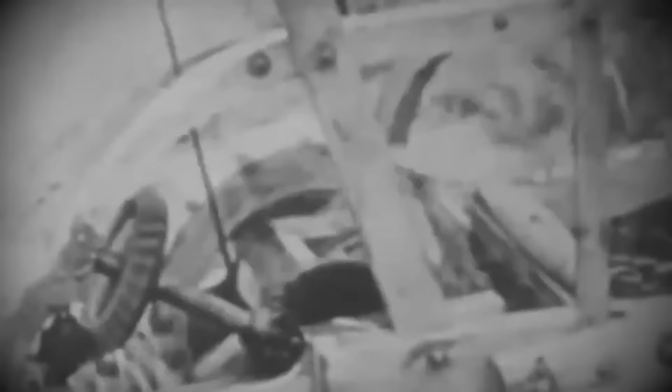The trouble started in Europe in 1914. World War I wasn't just a conflict of munitions, it was a war of logistics. As the front line stabilized, the global food supply chain buckled. The primary engine of agriculture for millennia, the horse, was suddenly removed from the equation. British and French armies, working through American agents, purchased millions of draft animals to haul artillery and supplies.

By 1917, relying on the remaining livestock became an economic impossibility. A single horse required 5 acres of crops annually just to sustain itself. With corn prices spiking 156% since the start of the hostilities, biological power was no longer viable. Simultaneously, the labor force evaporated. Young men left for the front, leaving fields unworked.

The global demand for wheat skyrocketed, and the only solution was a machine that didn't consume expensive grain or require rest. The tractor ceased to be a novelty for the wealthy. It became a tool of survival.

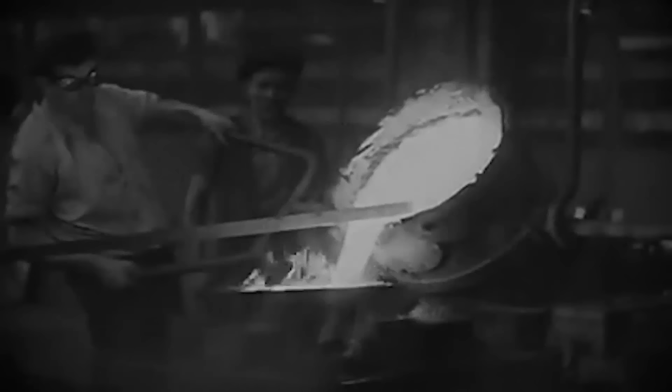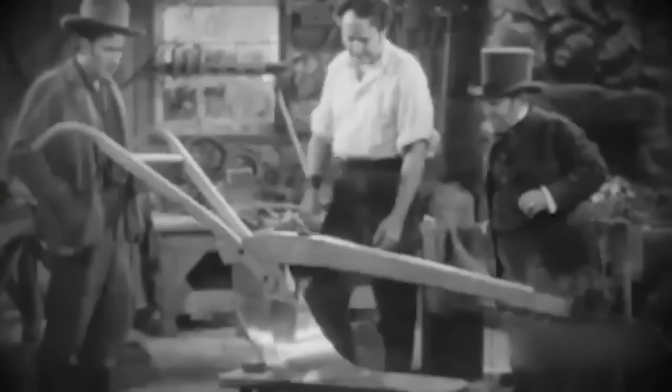In Moline, Illinois, John Deere remained the undisputed leader in tillage. They were masters of metallurgy, forging blades that could scour clean, even in sticky prairie soil. They had an extensive dealer network and a reputation for durability. However, they possessed a fatal technical gap. They were blacksmiths in the age of mechanics. They understood leverage in steel, but they had almost no internal capacity for internal combustion engineering.

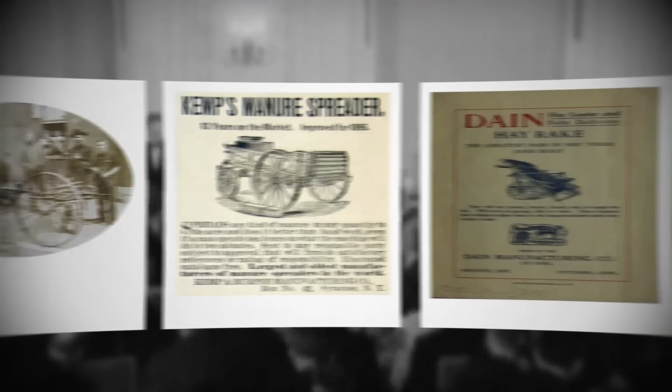At the helm, William Butterworth viewed the emerging tractor market with skepticism. The son-in-law of Charles Deere, Butterworth was a fiscal conservative who prioritized liquidity over innovation. Between 1910 and 1912, Deere had completed a massive acquisition spree, buying 10 companies to build a full line of implements. Their capital was tied up in new factories, leaving no liquidity for R&D experiments.

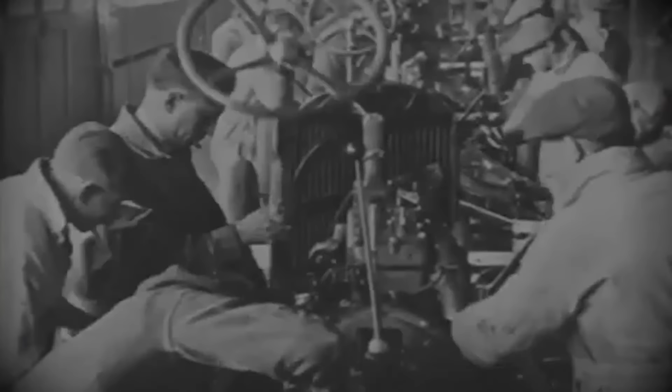In September 1916, Butterworth issued a blunt directive regarding mass production. "I am opposed to any discussion on Deere manufacturing tractors." While he allowed a small experimental run of Joseph Dain's all-wheel drive tractor, he refused to commit the capital necessary for a full-scale rollout. He effectively stalled the company's entry into the mass market just as it began to close in.

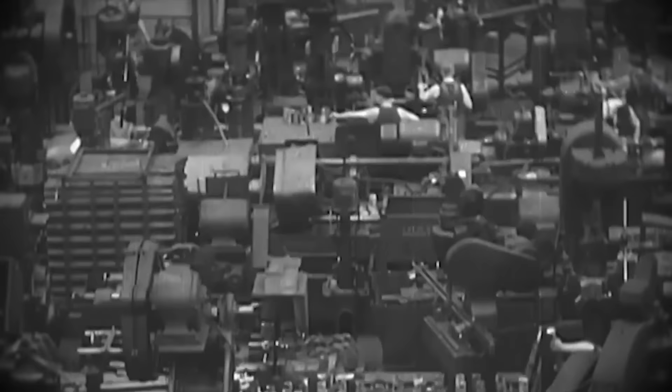By 1917, the industry landscape shifted into a pincer movement, and Deere stood directly in the center. On the high end sat the heavyweights, International Harvester. They were the General Motors of the field. Their Titan 10-20 and Mogul 8-16 were the standards of the day, but they were dinosaurs.

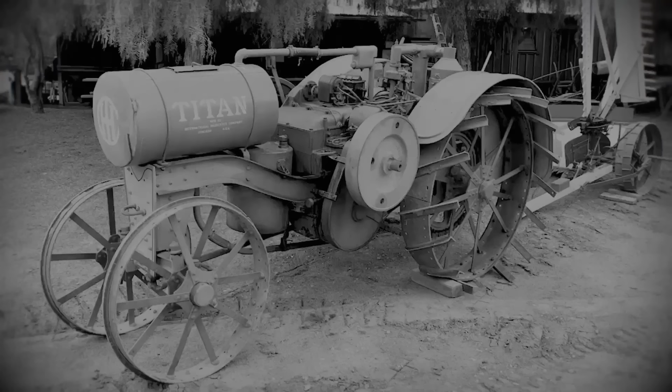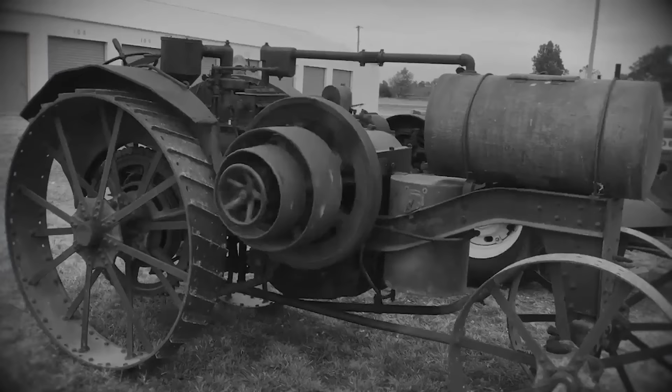The Titan was a massive 5,700-pound machine, powered by a slow-turning 2-cylinder engine that hammered away at just 500 RPM. These were essentially stationary engines on wheels, reliable, but heavy, expensive, and clumsy in small fields. If Deere attempted to build a heavy tractor to compete here, they would be outspent and out-engineered.

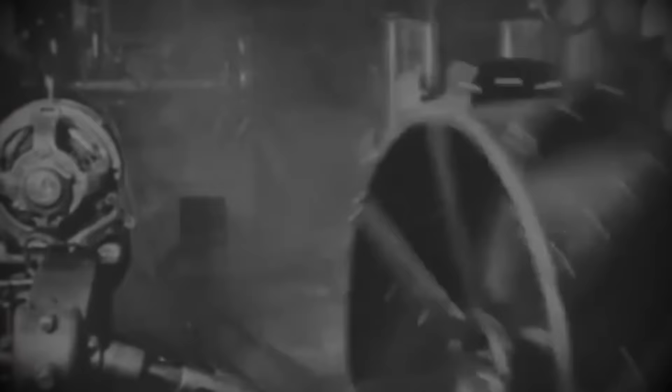The threat from the low end, however, was far more dangerous. Henry Ford turned his production capacity toward agriculture, introducing the Fordson Model F, and it completely rewrote the rulebook. Ford didn't just build a cheaper tractor, he built a fundamentally different machine. The Model F ditched the heavy rail frame entirely for a revolutionary unit construction design, where the engine, transmission, and rear axle housing were bolted together to form the chassis.

It weighed only 2,700 pounds, less than half the weight of an IH Titan. Yet its 4-cylinder, 251 cubic inch engine still delivered 20 belt horsepower at a screaming 1,000 RPM. Then came the price. Ford dropped the Model F at $750. This was predatory pricing. A Waterloo Boy Model N cost over $1,000. An IH Mogul was nearly as much for half the agility.

Ford was willing to accept razor-thin margins to capture market share, relying on unprecedented volume to generate profit. While competitors needed hundreds of dollars in profit per unit to survive, Ford could thrive on a fraction of that. He produced tractors on assembly lines at a speed traditional implement manufacturers could not comprehend, let alone match.

Butterworth's hesitation had trapped the company in a deadly position. Deere was too small to fight the capital dominance of International Harvester, and their production methods were too expensive to combat the engineering and pricing of Henry Ford. This was an existential crisis.

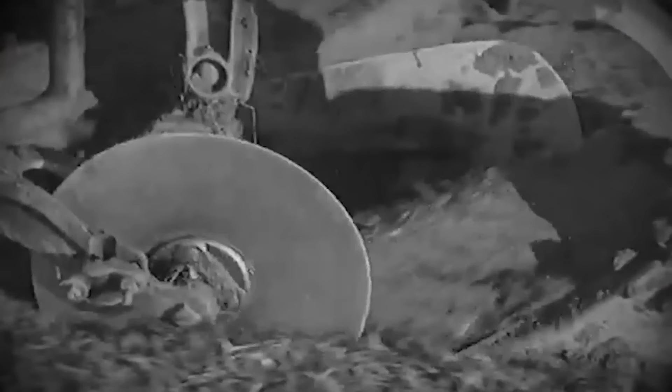Farmers weren't just buying tractors, they were abandoning horse-drawn plows. Every bright gray Fordson delivered to the farm was a Deere plow that went unsold. The tractor was no longer the future, it was the current standard. John Deere, the most iconic name in American agriculture, was on the brink of obsolescence. They needed a machine. They needed it immediately, and the paralysis in the boardroom had to break.

When the reality of the Fordson hit the boardroom in Moline, the atmosphere shifted instantly from hesitation to emergency execution. Deere wasn't just behind the curve, they were invisible in a market that was exploding. Management stopped debating whether tractors were a fad and started authorizing capital for anything with an engine. What followed was a period of frantic experimentation that produced some of the most mechanically confused machines in the company's history.

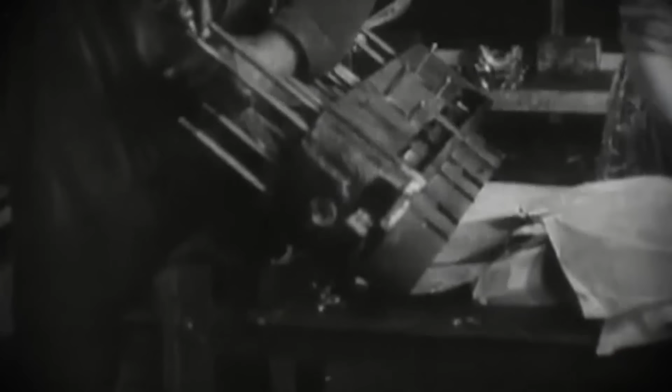You have to understand the level of desperation here. Deere didn't just try to build a tractor, they scrambled to invent one from scratch without a blueprint. The result was the Melvin, a mechanical dead end that looked less like a tractor and more like an engineering accident. The Melvin defied the logic of Midwestern farming. It was a motor plow, where the engine and the plows were fused into a single rigid frame.

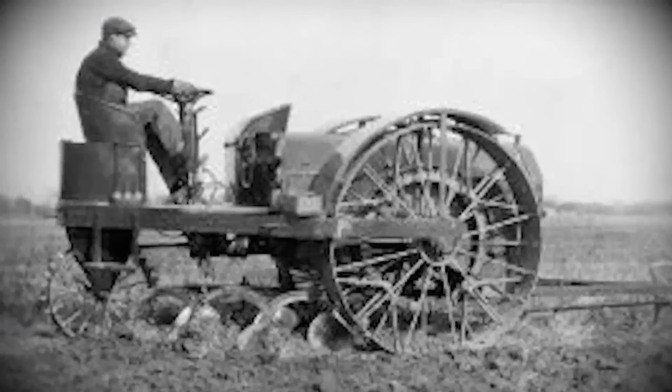While the concept seemed efficient on paper, it was a nightmare in the dirt. It was heavy, underpowered, and nearly impossible to maneuver. A farmer needs to pivot tight at the headland to line up the next furrow, but the Melvin handled like a locomotive. It became a sunk cost, a clumsy beast that was quickly scrapped, leaving the company embarrassed and empty-handed.

Internalizing the lesson that outside partnerships were risky, the board turned inward to their own head of engineering, Joseph Dain. Dain was a purist, a visionary who believed John Deere should never badge a product that wasn't mechanically superior. He locked himself away and designed a machine that was arguably decades ahead of its time. The all-wheel drive train was a masterpiece.

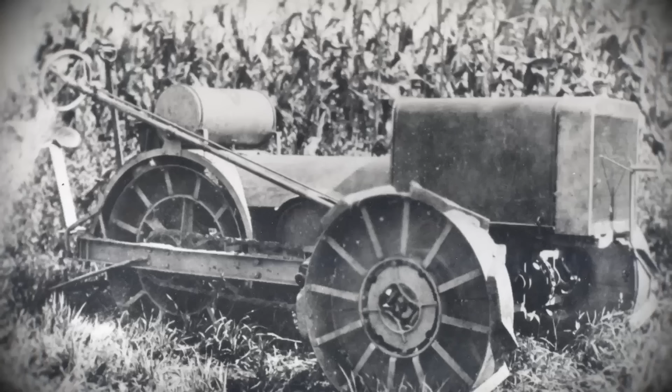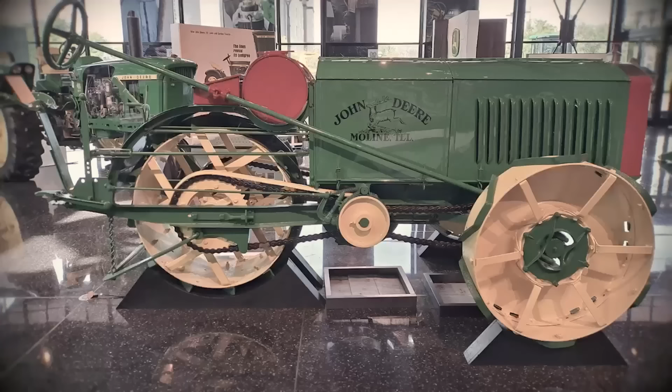The R&D department looked at the Dain and saw the future, a machine that finally bridged the gap between the blacksmith and the engineer. However, the board of directors looked at the Dain and saw a bankruptcy filing. The problem wasn't the engineering, it was the unit cost. To build the Dain with its precision-cut gears and high-tensile steel cost a fortune.

Internal estimates pegged the retail price between $1,200 and $1,600 just to break even. This hit the table at the exact moment Henry Ford was flooding the market with the Model F for $750. The math was brutal. You cannot sell a luxury tractor to a farmer struggling to buy seed. The Dain was too good, too expensive, and too late.

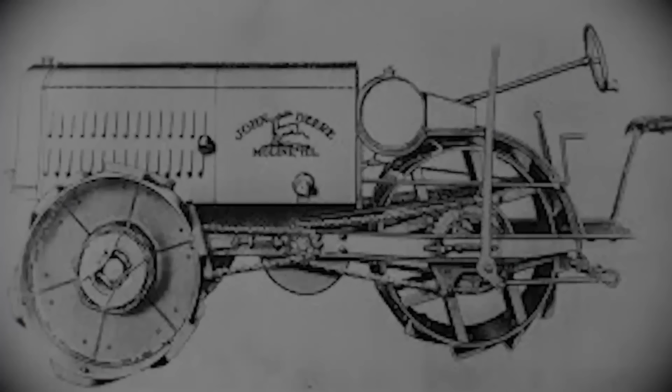Tragically, Joseph Dain never saw the final decision. In October 1917, while pushing himself to the limit field testing the machine in the cold damp of fall, he contracted pneumonia and died. The project died with him. Butterworth shelved the plans. They had built the perfect tractor, but they had to abandon it because it couldn't survive in a Ford world.

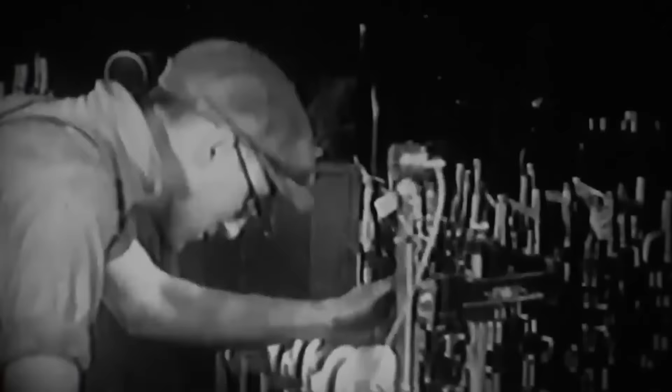The company was left in a darker place than where they started. They had wasted years and capital on the Melvin disaster. They had sacrificed their best talent on the Dain tragedy. Now as 1918 approached, the king of the plow had no tractor, no engine, and no plan. They had tried the path of acquisition, and they had tried the path of perfection. Both had failed.

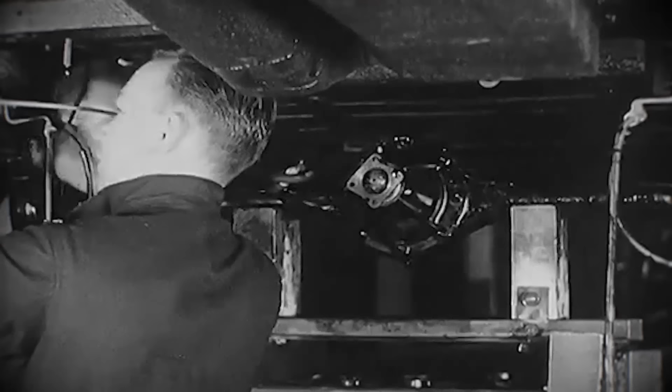With their engineering pride stripped away, the directors realized they had run out of time for invention. They could no longer afford to be idealistic. If they wanted to survive the year, they would have to stop looking for a beautiful solution and start looking for a profitable one. The answer wasn't in Moline, it was waiting in Iowa, in the form of a loud, vibrating, kerosene-burning machine that their own engineers considered an insult to the mechanic's trade.

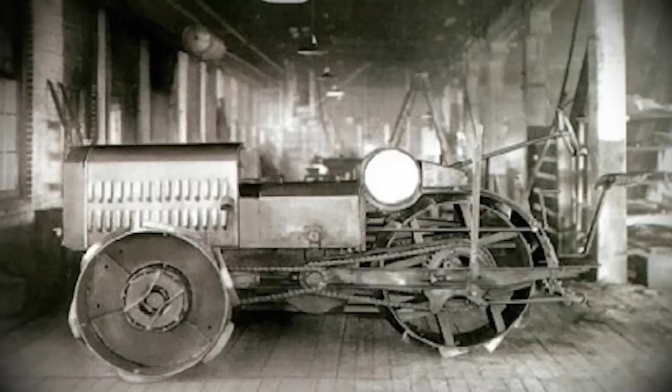The solution didn't come from a drawing board in Moline. It came from a pragmatic factory in Iowa. Enter the Waterloo Boy. If the canceled Dain project was a thoroughbred, the Waterloo Boy was a draft mule. It was loud, exposed to the elements, and transmitted vibration so violently that operator fatigue was a genuine hazard.

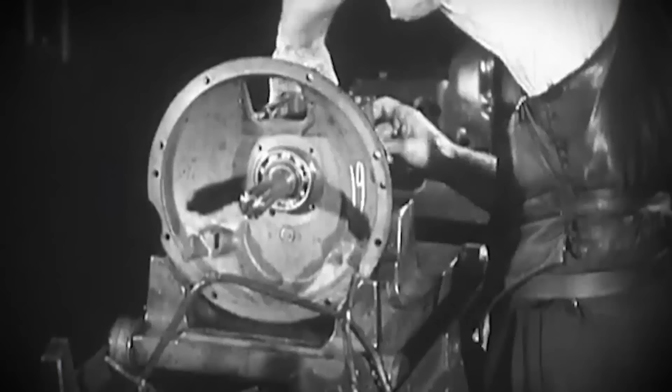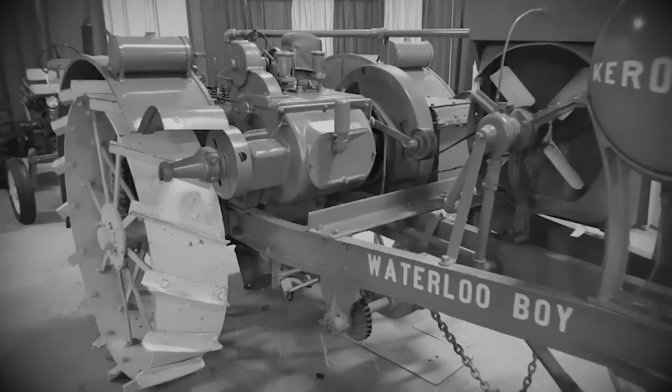Deere had spent 6 years trying to develop a tractor internally, pouring capital into prototypes like the Dain only to produce negligible volume. They realized too late that a boutique machine could not compete with Ford's assembly line or International Harvester's market saturation. They were cornered, and the Waterloo Boy was the only viable lifeline. To understand why this machine worked, you have to look at the power plant. The Waterloo Boy was driven by a horizontal 2-cylinder engine with a unique firing interval.

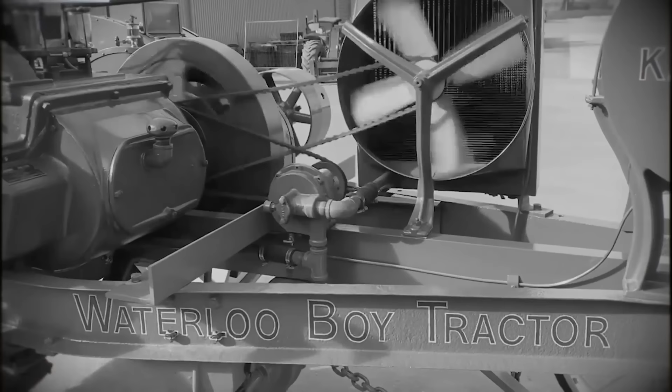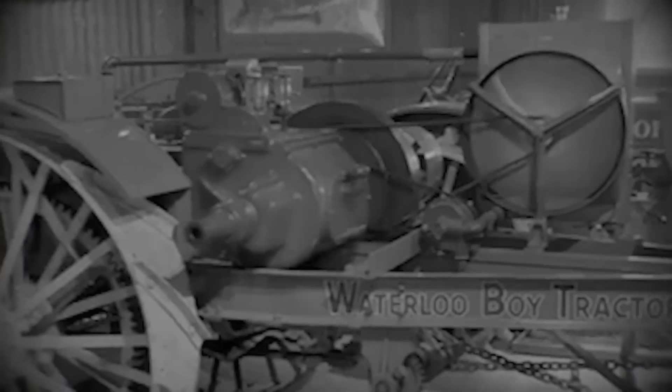It fired at 0 degrees, then again at 180 degrees, followed by a long passive coast of 540 degrees. This massive gap in the power stroke required a heavy flywheel to store kinetic energy and keep the crankshaft spinning during the lull. This created the distinctive syncopated rhythm that would eventually earn these engines the moniker Johnny Popper.

The design wasn't just eccentric, it was a specific engineering response to fuel economics. In 1918, gasoline was a precious war commodity. Kerosene, however, was a cheap, heavy byproduct of refining that few engines could burn effectively. It had a high flash point and tended to soak spark plugs rather than vaporize.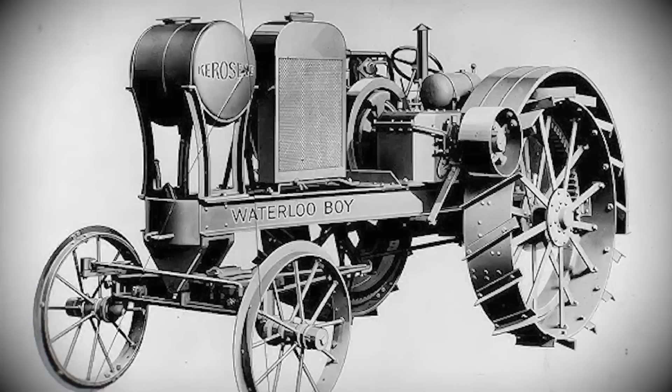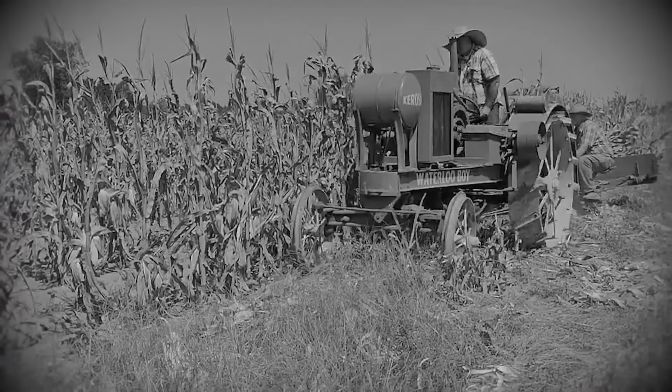The Waterloo Boy solved this through thermal mass. The engine utilized a low compression ratio and a heavy cast iron block that retained immense heat. This heat effectively cooked the kerosene in the manifold, vaporizing it enough for ignition. It was a hot engine operationally. It smoked and it knocked, but it turned the cheapest fuel available into reliable torque when more delicate, high-compression engines failed.

This brought William Butterworth to the most expensive decision of his career. He wasn't just buying a patent, he was acquiring a completely different manufacturing philosophy. The Waterloo Gasoline Engine Company was already moving volume, but the asking price was staggering, $2,350,000. In 1918, that sum represented a massive leverage of the company's future. Butterworth, a man who despised debt, was being asked to drain the reserves for a factory that built a machine his own engineering department despised.

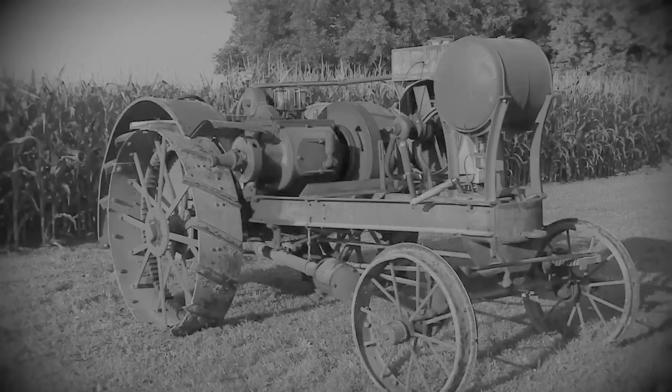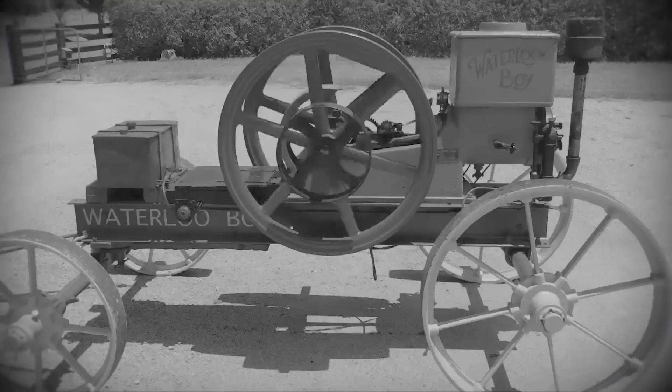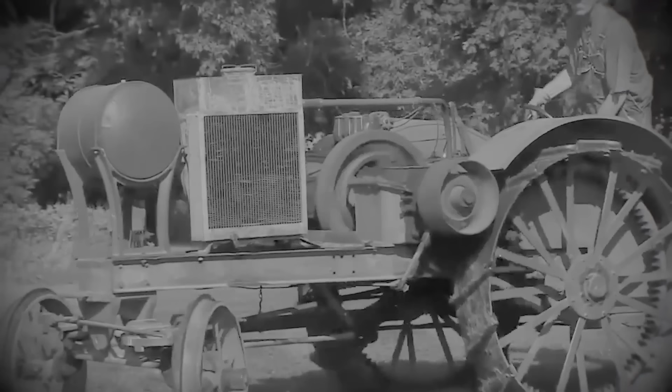The internal conflict was palpable. Moline engineers dismissed the Waterloo Boy as crude agricultural iron. It lacked the tight tolerances, enclosed gearing, and high-tensile steel of their deceased Dain project. They argued that placing the John Deere trademark on such a crude, vibrating contraption would degrade the brand. But the dealers saw the reality of the field. They saw a tractor that maintained traction in the mud, and a machine a farmer could repair with basic hand tools.

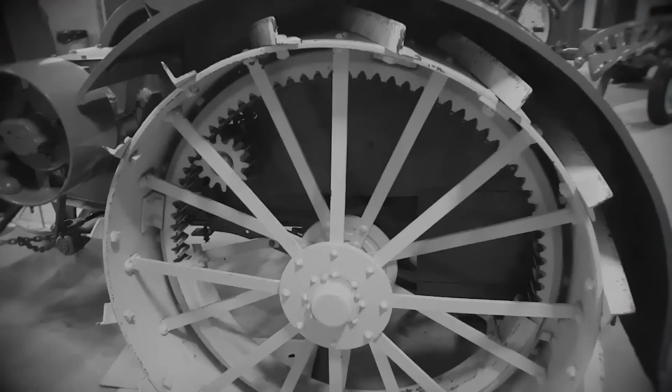More importantly, when you looked at the spec sheet, the philosophy gap was obvious. Ford was selling a Greyhound, lightweight, high-revving, and cheap. The Waterloo Boy was a bulldog. It was a heavyweight contender at 6,100 pounds, anchored by a massive 465 cubic inch engine that chugged along at just 750 RPM. It cost significantly more, around $1,150. But that extra weight and displacement translated into something the Ford lacked: sheer, low-end torque and a cooling system that didn't boil over after an hour of hard plowing.

Butterworth looked at these numbers. He saw that while Ford won on price, the Waterloo won on durability and simplicity, crucial factors for farmers transitioning from horses. He realized that technical perfection was the enemy of corporate survival. On March 14, 1918, the hesitation ended. Butterworth signed the check. John Deere acquired the Waterloo Gasoline Engine Company. With one signature, the company pivoted its core identity from steel plows to kerosene horsepower.

The deal was done, but the integration was hostile. Deere owned the factory, but they had inherited a cultural conflict that would define the company for the next decade. As the ink dried, the company effectively fractured. One half of the story was about to unfold on the war-torn fields of Britain, while the other was brewing on the factory floor in Iowa.

The validation of this controversial purchase didn't happen in an American showroom. It happened in the mud of the Western Front supply lines. By 1918, Great Britain was effectively under siege. German U-boats had severed the critical Atlantic supply arteries, creating a hunger blockade that threatened to starve the Allied war effort into submission. Britain needed to grow its own food, and it needed to break ground immediately.

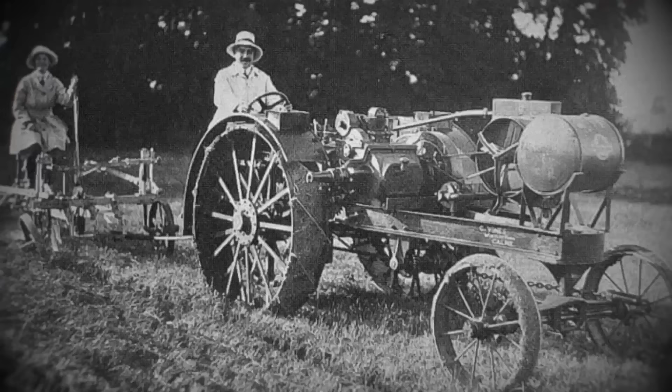Deere found themselves stepping into an operation that was already running at redline. Since 1915, an importer named L.J. Martin had been bringing Waterloo Boys into the UK and rebranding them as the Overtime. These units were painted a nondescript battleship gray, stripping away the American branding for the British market. While the executives in Moline terrified themselves thinking this crude machine would damage their premium reputation, the Overtime was busy saving the country.

The conditions in England were brutal, but this is exactly where the low-tech nature of the machine became its greatest asset. Gasoline, petrol, was strictly rationed for the military, making the Waterloo Boy's ability to burn cheap, unrefined kerosene, known as paraffin in the UK, a logistical lifesaver. Furthermore, with the male workforce conscripted, the fields were often worked by the Women's Land Army. These operators needed a machine that was simple and forgiving, not a complex piece of engineering that required a master mechanic to finesse. While complex British steam engines bogged down in the deep clay, the Overtime kept chugging.

But back in Moline, there were no celebrations. A civil war had broken out inside the factory walls. You have to remember who these engineers were. These were men who had spent their lives perfecting the curve of a self-scouring steel plow.

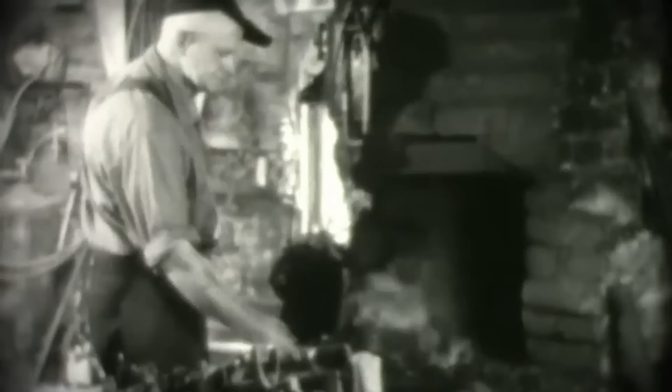They viewed themselves as artists of agriculture, accustomed to high-grade polished steel and micrometer precision. To them, the Waterloo Boy wasn't a savior, it was a mechanical insult. Leading the opposition was L.R. Clausen, a man who viewed the Waterloo factory not as a manufacturing plant, but as a blacksmith shop. In the hierarchy of manufacturing, this was a fighting slur. It implied that the machine was hammered together by a brute rather than designed by a mechanic.

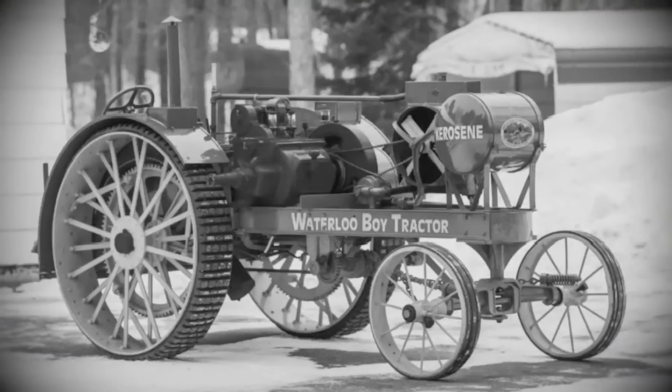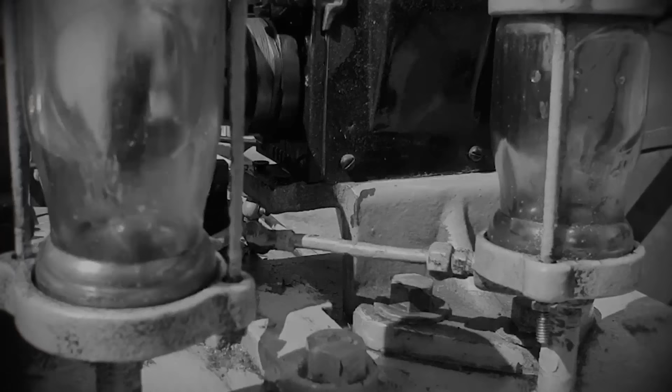Clausen and the Moline Old Guard had a specific technical grievance: exposed gearing. The Waterloo Boy's final drive gears were open to the elements. In the sandy, dusty conditions of American farming, open gears act as a grinding paste, wearing down steel teeth rapidly. Moline demanded an immediate redesign, with enclosed, oil-bathed transmissions. They argued that selling this Iowa-built contraption was a betrayal of the legacy established by John Deere himself.

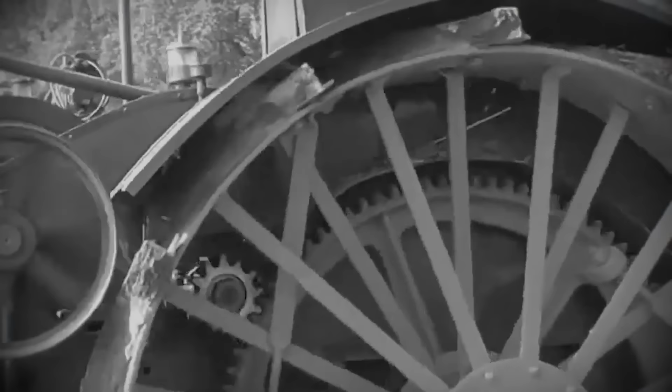This wasn't just professional jealousy, it was a clash of cultures. The Moline faction believed in engineering purity. The Waterloo faction believed in utility. They didn't care if the engine sounded like a cannon or if the gears were naked, as long as it started on a cold morning and dragged a plow for 10 hours straight. The tension threatened to fracture the management, but the numbers coming back from the overtime operation were impossible to ignore.

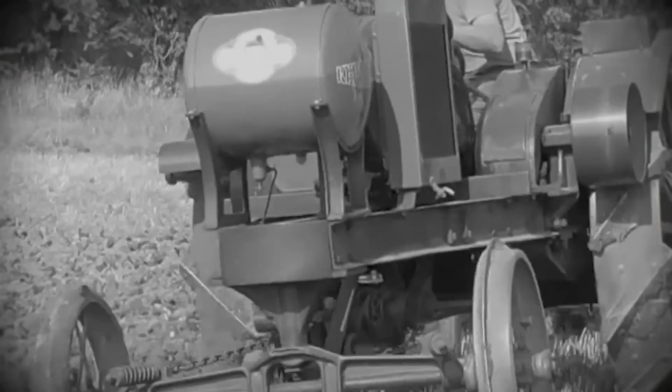The British farmers didn't care about the lack of refinement. They cared that the tractor cost half as much as the competition and actually finished the job. The overtime proved that in a crisis, whether a world war or a corporate pivot, reliability is the only metric that counts. Slowly, begrudgingly, the mood in Moline shifted. The engineers didn't learn to love the machine, but they started to accept the revenue. They stopped seeing it as a stain on their reputation and started seeing it as the engine that kept the lights on. The pragmatic victory was complete. The blacksmith's job had outperformed the masterpiece.

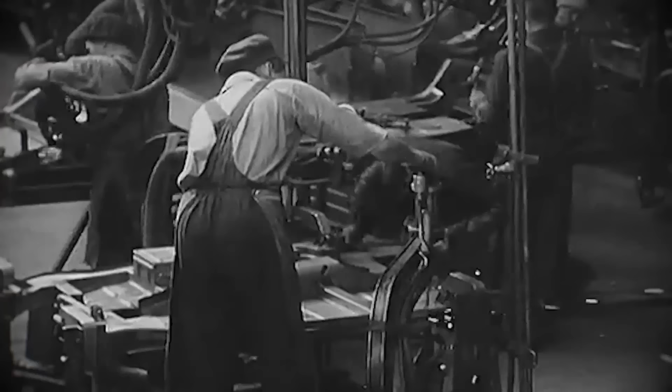With the internal strife settling into a fragile truce, the company finally had a unified front, and they would need it. While they were fighting amongst themselves, a shadow had fallen across the American market. The internal war was over, but the external war was just beginning. Henry Ford was done playing nice with pricing, and he was preparing to unleash a machine that wasn't just cheap, it was physically dangerous.

By 1920, the economic friction between Henry Ford and John Deere had shifted from a skirmish to a slaughter. Ford wasn't content with market dominance. He wanted market erasure. He drove prices down relentlessly, slashing the Fordson Model F to a staggering $395 in early 1922. To put that in perspective, Ford admitted he was selling units below his own production cost, using his massive automotive profits to subsidize the losses just to starve out the competition. For Deere, selling the Waterloo Boy at that price was a mathematical impossibility. They were staring down a barrel where the only outcome looked like liquidation.

But while Ford was winning the price war, he was losing the battle of physics. The two machines represented diametrically opposed engineering philosophies. The Fordson was sleek, modern, and automotive. It weighed only 2,700 pounds and introduced the revolutionary unit frame design. It was light, agile, and seemingly high-tech. In contrast, the Waterloo Boy looked like a fossil. It was built on a heavy channel iron frame, carrying that massive thumping two-cylinder engine. It weighed over 6,000 pounds. But in the erratic world of early mechanized farming, that weight wasn't a penalty, it was an anchor.

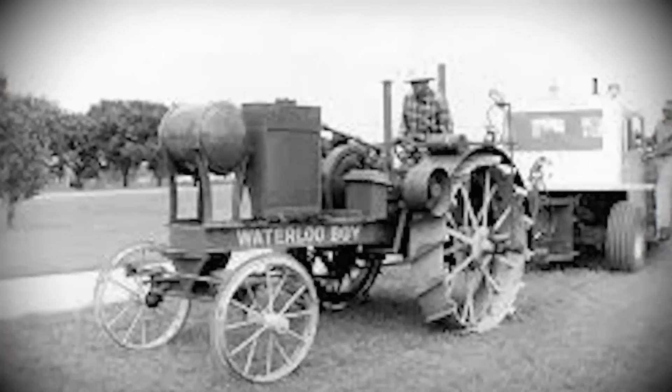The showdown moved to a new impartial arena, the Nebraska tractor test. This wasn't a sales floor, it was a scientific gauntlet mandated by law to separate marketing lies from mechanical truth. On April 9, 1920, the Waterloo Boy Model N became the very first tractor tested, test number 001. The results were vindicating. It didn't just survive, it thrived, delivering nearly 16 drawbar horsepower and 26 belt horsepower, exceeding its advertised ratings. Under that same scrutiny, the glossy image of the Fordson began to crack.

Its greatest strength, its light weight, turned out to be a lethal flaw. The Fordson utilized a high-torque worm gear final drive. If the rear wheels hit a stubborn rock, that torque had to go somewhere. Because the front end was so light, there was no counterweight to stop the physics. In a split second, the nose would lift, and the machine would flip backward, crushing the driver in the metal seat. Farmers grimly nicknamed it the Widowmaker. It was cheap, yes, but the cost of ownership often included your life.

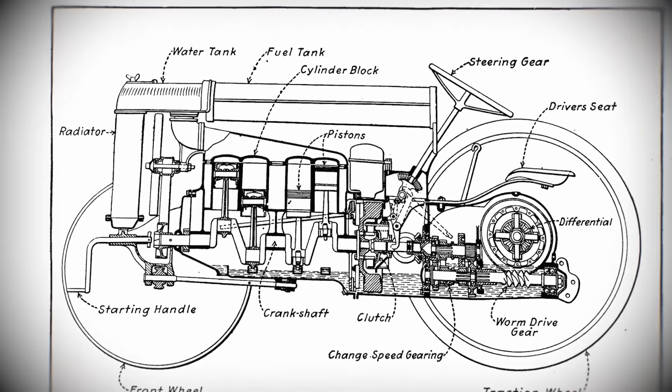Furthermore, the tests exposed a critical reliability issue. The Fordson used a thermosiphon cooling system. It had no water pump. It relied on hot water rising naturally to circulate coolant. When subjected to the grueling stationary work of threshing, where a tractor sits still at full throttle for hours running a belt, the Fordson simply couldn't shed the heat. It boiled over constantly.

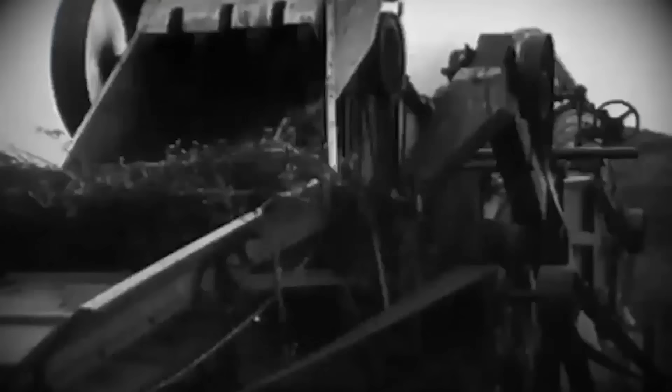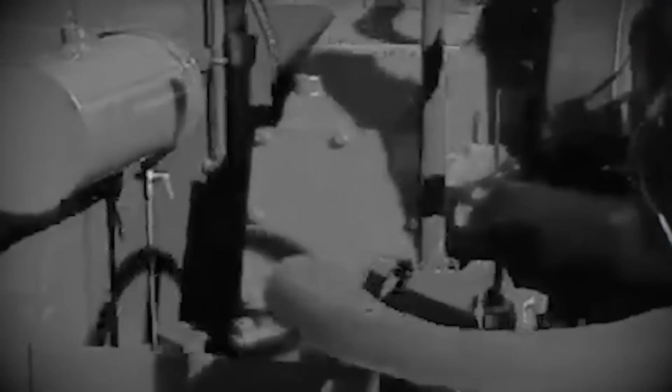This is where the Waterloo Boy's primitive design suddenly looked like genius. The machine's massive engine featured a high-capacity cooling system and that crucial hot manifold. While the delicate Fordson choked on hot kerosene and boiled its radiator, the Waterloo Boy's massive iron block acted as a giant heat sink. It didn't just tolerate the heat, it harnessed it to vaporize the fuel. The heavy frame that made it look obsolete acted as a safety ballast, keeping the nose on the ground when the plow hit a rock.

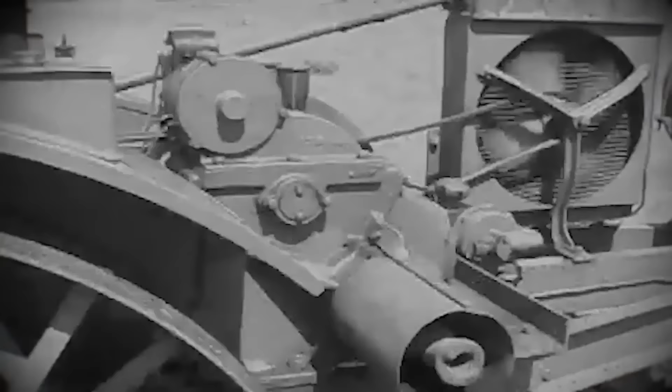The open, chugging engine that sounded so crude ran cool and steady, hour after hour. The results were undeniable. The Fordson was a sprinter that collapsed in a marathon. The Waterloo Boy was a tank. Farmers began to realize that saving money on the purchase price wasn't worth much if the machine spent half its life cooling down and the other half trying to kill you. Deere's sales teams seized on this, marketing the Waterloo Boy not as the cheapest option, but as the one that would ensure you came home for dinner.

The technology had survived the ultimate test, and the company had weathered the storm. However, the executives in Moline knew they couldn't sell ugly forever. The engine had proven its soul, but the chassis was still an eyesore. To secure the next century of dominance, they needed to take this winning heart and wrap it in a body that looked like a legend.

By 1923, the identity crisis was over. The company stripped the Waterloo Boy badge off the radiator and rolled out a machine that was finally proud to carry the founder's name. This was the birth of the Model D, the first tractor to exclusively bear the brand John Deere. It wasn't just a rebrand, it was a synthesis. The Model D represented the moment the two warring tribes within the company finally merged their strengths into a single piece of iron. The heart of the machine remained the rugged, horizontal two-cylinder engine from Iowa, initially 465 cubic inches, later bored out to 501.

But the chassis was pure Moline. The crude exposed bull gears that had disgusted the Illinois engineers were gone. They were replaced by a compact, fully enclosed transmission case running in a constant oil bath. This brought automotive-grade precision to the filth of the farm, finally granting the wish of the Moline engineers who had despised the open gears. The result was a machine so robust it stayed in production for 30 years, until 1953, the longest production run of any tractor in the company's history.

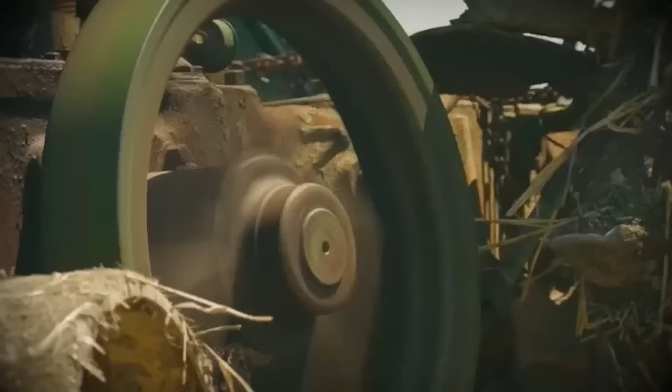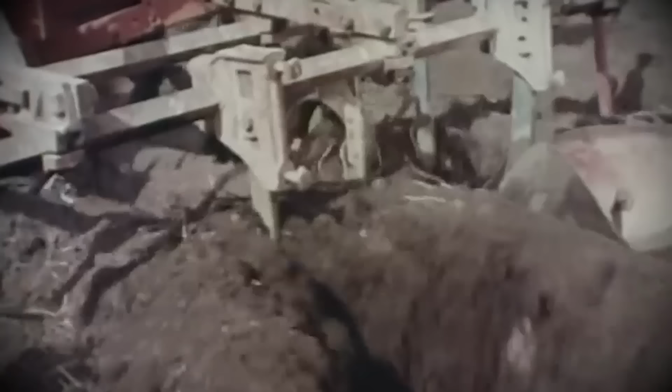But that sound was really the sound of stored energy. That long pause in the firing order allowed the engine to rely on the massive thermal and kinetic mass of the flywheel to power through load spikes. When a lightweight multi-cylinder engine hit a tree stump or a patch of clay, it would often stall immediately. The Johnny Popper would just grunt, drop in RPMs, and let the flywheel momentum drag the plow through the obstacle. It was an engine designed for low-end torque, not horsepower, and it earned a reputation for being nearly impossible to stall.

Looking back, the acquisition of the Waterloo Gasoline Engine Company stands as one of the most successful corporate gambles in industrial history. William Butterworth's decision to spend $2.35 million, a sum that terrified his accountants, didn't just buy a factory, it purchased the company's soul. The ugly technology that the Moline engineers once despised became the cornerstone of the brand's dominance. The reliability of that two-cylinder engine financed the company's expansion and allowed them to survive the Great Depression while others folded.

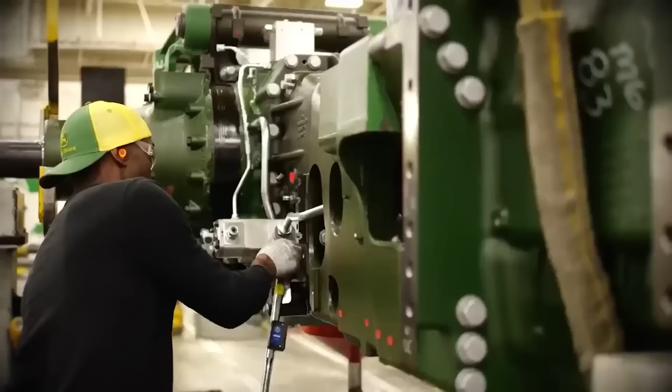Today, if you visit Waterloo, Iowa, you will find the John Deere Waterloo Works. It remains the company's flagship facility and one of the largest tractor-producing plants in North America. The gamble paid off, not because they bought the most advanced technology, but because they bought the one thing that actually worked when the conditions got tough. That check for $2.35 million didn't just save the company from extinction, it bought them the future.